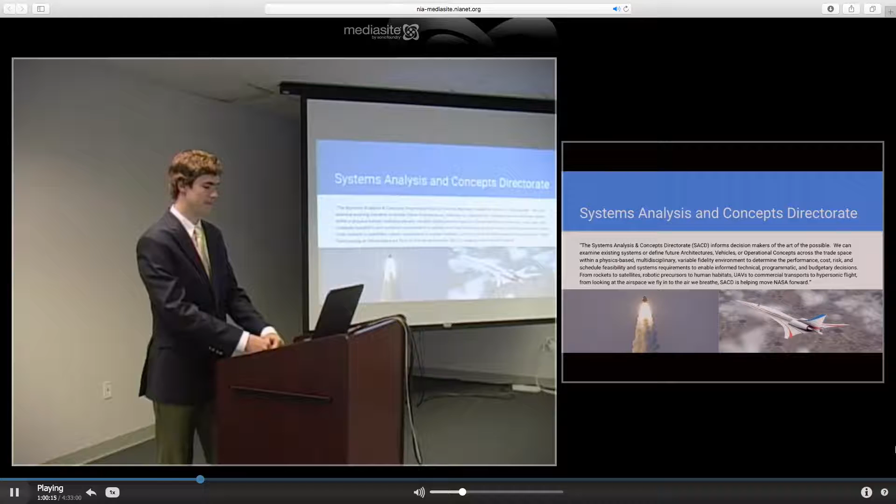The Systems Analysis and Concepts Directorate, SACD, informs decision makers of the art of the possible. We can examine existing systems or define future architectures, vehicles, or operational concepts across the trade space within a physics-based, multidisciplinary, variable fidelity environment to determine the performance, cost, risk, and schedule feasibility and systems requirements to enable informed technical,

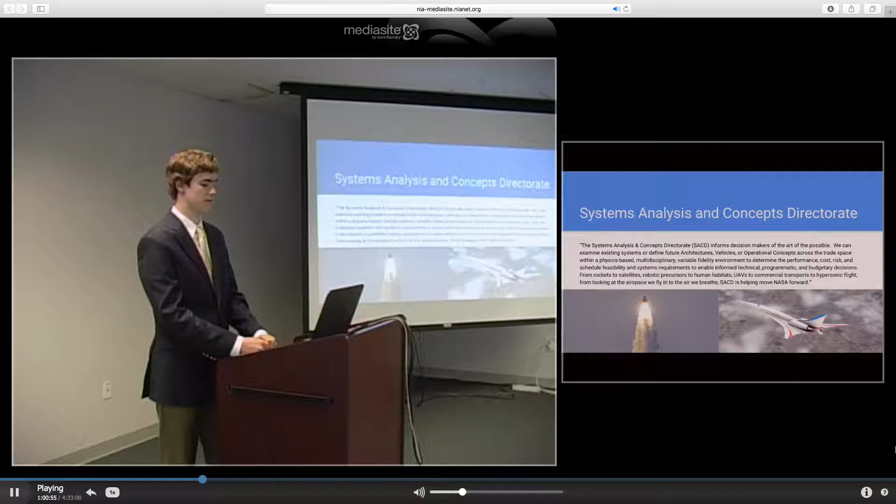programmatic, and budgetary decisions. From rockets to satellites, robotic precursors to human habitats, UAVs to commercial transports to hypersonic flight. From looking at the airspace we fly in to the air we breathe, SACD is helping NASA move forward. And the Vehicle Analysis branch.

The VAB applies its multidisciplinary system-level expertise of high-speed atmospheric flight and end-to-end space transportation systems to connect appropriate technologies to innovative system solutions that enable Langley Research Center strategic thrusts to support NASA mission goals. We employ deterministic and probabilistic variable fidelity analyses, implementing empirical and physics-based methodologies in order to provide timely, insightful analysis from concept to flight.

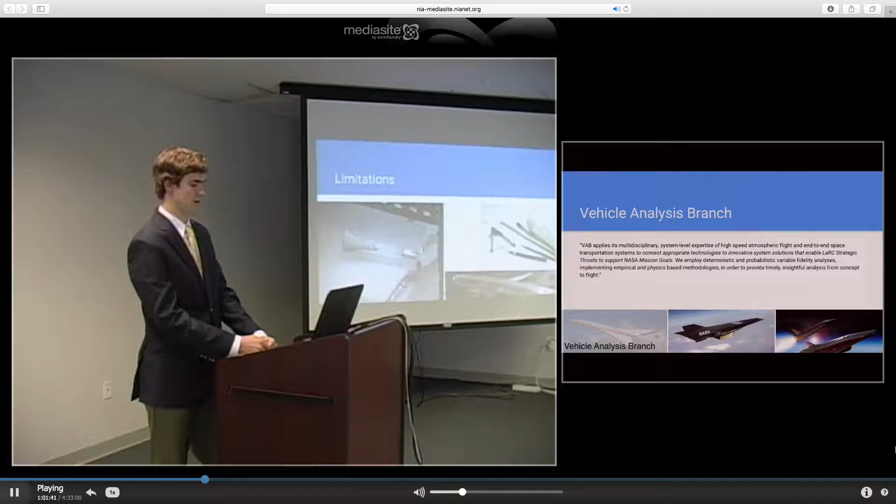Okay, so before the days of powerful computers, CAD software, and computational fluid dynamics, if you wanted to test the aerodynamics of an aircraft or a spacecraft, you had to build a wind tunnel. And you had to model it, or draw it at least. You couldn't model it, really. You had to draw it, which required lots of skills to be learned, and you needed someone to model something, which required a lot of time and a lot of technical skills. Wind tunnels also are hard to operate, and you can only do one thing at a time.

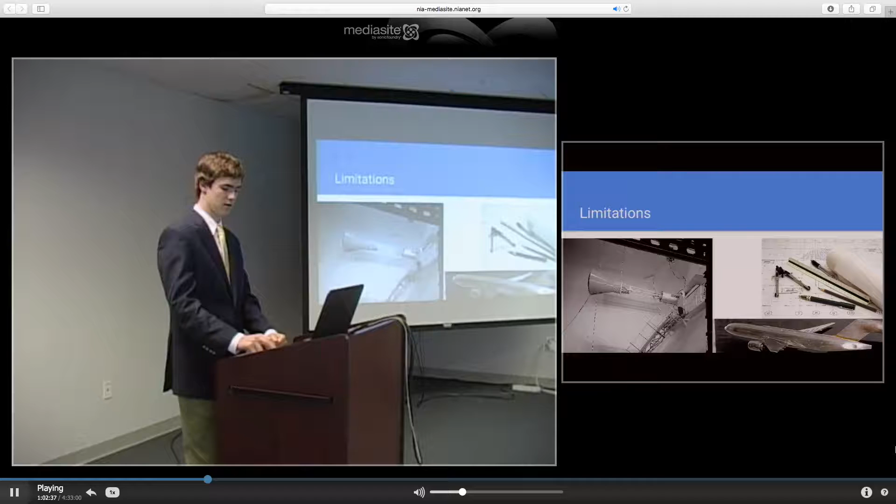With the invention of powerful computers and CAD software, that process became a lot quicker and more streamlined. Nowadays at NASA, anybody can model an aircraft on their computer, and they can test it in the CFD program. So this summer I worked with OpenVSP, which is one of these programs. More standard CAD programs are made to design relatively anything, but OpenVSP is specifically designed for aircraft.

Also, CAD and CFD programs are usually separate, and so that requires a bit of work to get a CAD file to work in a CFD program. OpenVSP has a simple CFD program built in to allow quick early aero analysis of a model. So specifically, OpenVSP has these traits that make it helpful for aircraft design. It has quick modeling. It's very easy to build something quickly in OpenVSP, but it's also highly accurate if you want it to be. You can build very accurate aircraft. And so it's specifically made for aircraft design and, of course, the built-in CFD software.

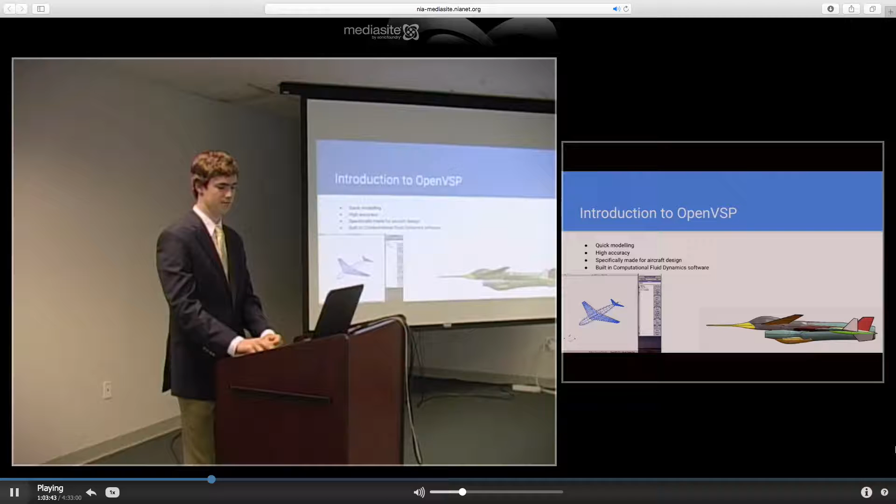So design in OpenVSP, how is that specifically made for aircraft? Well, first of all, you can right away, just by choosing what you want, say a wing, fuselage, or pod, create that. For example, on the right you see what you get if you just select wing, or on the bottom what you get if you select fuselage. And you can then modify these parts in different ways that are specific to how you would want to modify those parts. For example, for the wing, you can change the chord, the span, the angle of attack, you can change the shape of the airfoil, all sorts of stuff.

And for the fuselage, you would change that in more conventional ways, length, width, height, all sorts of stuff like that. So that helps you model more quickly and more efficiently. But that also allows you to model very accurately. For example, an airfoil is pretty difficult to model in a regular CAD program. But since it's specifically designed into OpenVSP, it makes it a lot easier, a lot more accurate, and also a lot quicker.

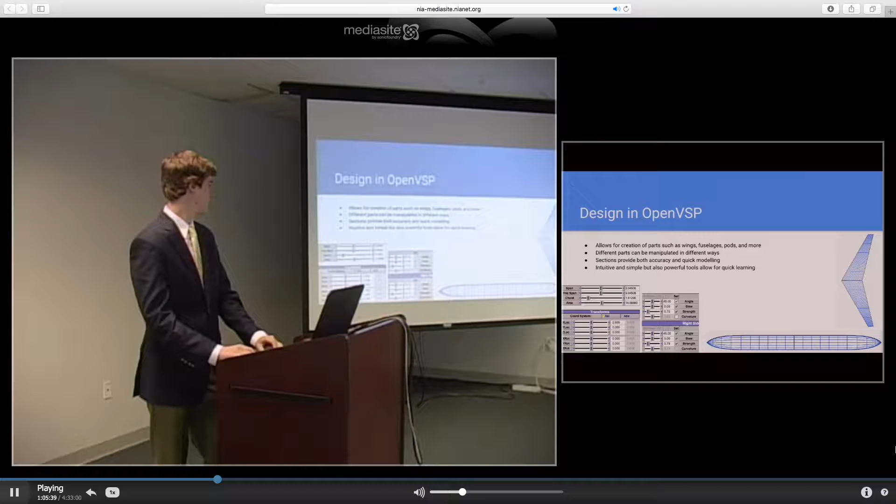Because of this, OpenVSP is actually also very intuitive and easy to learn. Because instead of having to learn a lot of unusual controls to get a roundabout, sort of long approach to get a shape you want, you just go straight ahead to that shape. And here are some of the controls that you can use in VSP. For example, on the top left there, you have the span, chord, area, projected span. Those are all for wings. On the bottom left, you can move things in the X, Y, Z axes, and you can also rotate them. And there's all sorts of other controls that you have that once you learn them, they're very intuitive and very easy to use.

Another great tool that comes with OpenVSP is the VSP Hangar, which is online and allows NASA workers to quickly share files between each other. And it also allows you to access files if you don't want to store them on your computer and take up a lot of space. So you can just go online to the VSP Hangar and load up these files onto your computer and do analysis on them, or adjust them to make them more accurate, or just change them however you want.

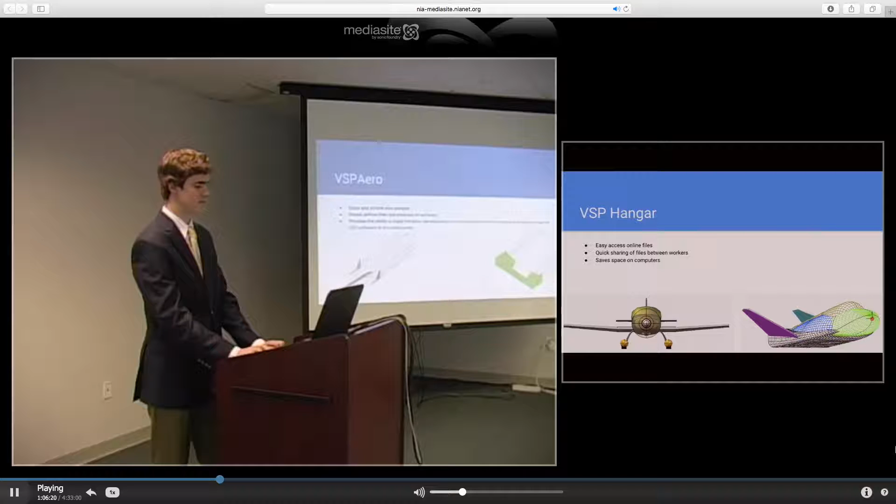So VSP Aero. VSP Aero is the CFD program that's built into OpenVSP. It allows quick and simple aero analysis of an aircraft or just a simple part. It shows airflow lines coming off of an aircraft and pressure on surfaces. And it provides you with just a basic idea of the aerodynamics of a model before it can be tested in a specific CFD program more accurately, or in a wind tunnel even.

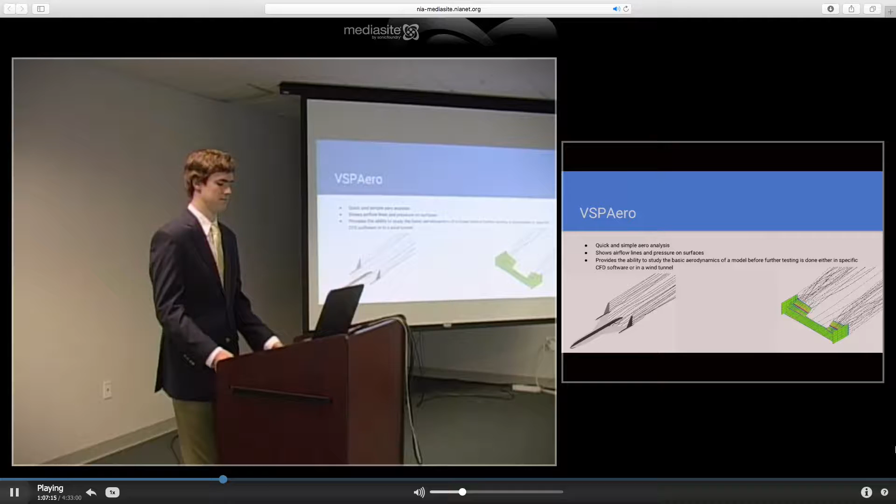And below you just see two examples of things tested in OpenVSP and VSP Aero. On the left you can see an aircraft, and you might see that the fuselage looks sort of like an extended bluff. That's just because in VSP Aero Viewer, everything's modeled in a sort of 2D thing, but the analysis actually is done on the 3D model. That just helps the program run more quickly.

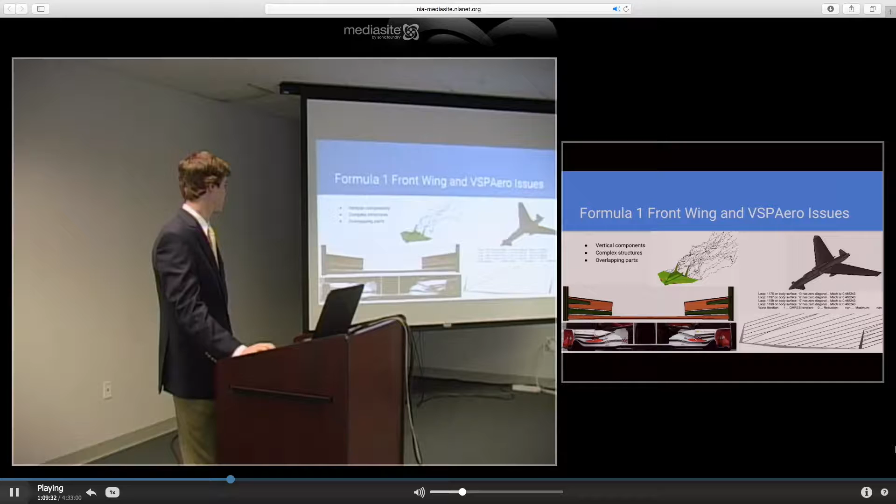So here's a more in-depth view of the issues with vertical components. So what I've modeled here is just a quick, simple sort of version of a Formula One front wing with multiple elements and vertical end plates. And in the top left, we see the left half of that wing viewed from the rear in VSP Aero without that vertical element. And you can see two nice vortices coming off of the edges of the wings.

And that's from higher pressure airflow on top of the wing, rolling off the sides of the wing and going down to the lower pressure air below the wing. And that reduces your wing efficiency and, in this case, the downforce that you're generating, which is something you don't want, which is why these vertical end plates are put there, because they keep the flow separate.

However, if you see in the bottom left, it's kind of hard to see the vertical end plate that's there because it's just modeled in 2D again, but it's calculated for the 3D shape. You can see that VSP Aero is all sorts of confused with that. The vortex on the right side is still looking good, but on the left, well, it's pretty insane.

There's two reasons that it's getting confused. First of all is the vertical component, and also the overlapping of the parts. Obviously, the elements of the wing wouldn't just be floating in space on a real Formula One car. They're attached to the vertical element, and I did that in the model, as you can see on the right. But VSP Aero doesn't like that.

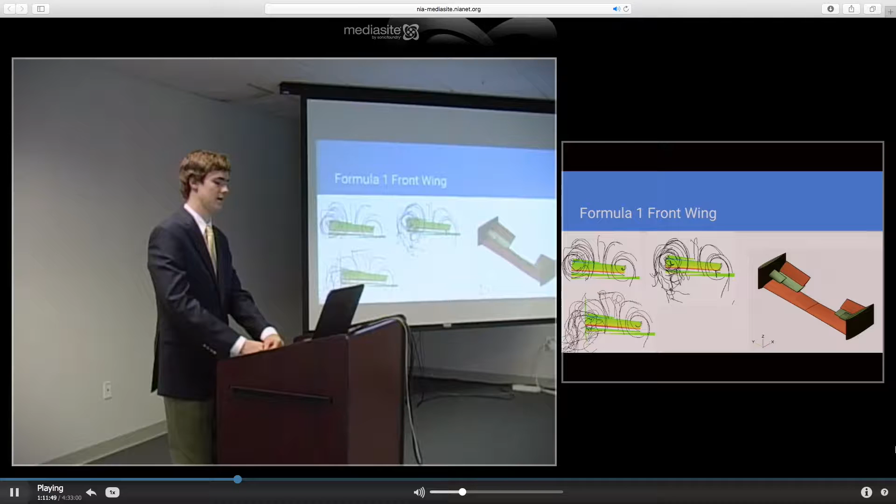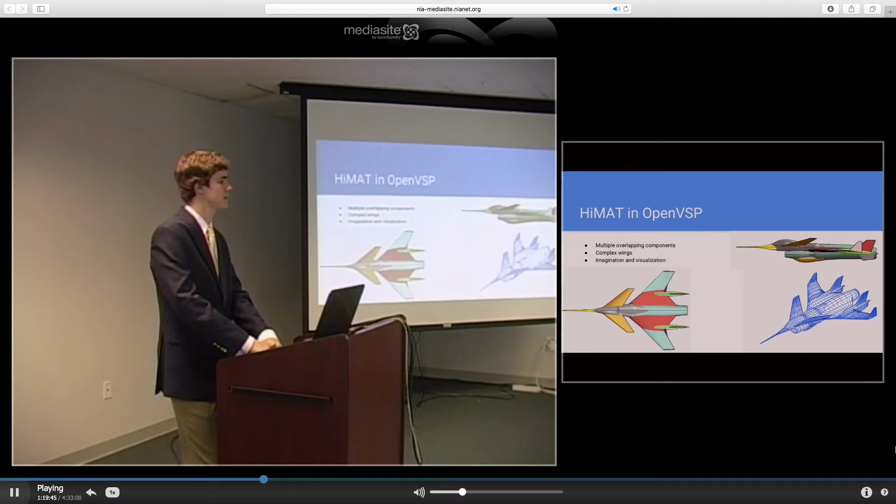I noticed on one slide you had a bunch of the sliders that adjust the degrees of things. Is that right? Yeah, those right there. So if you were to adjust those, would it adjust the degrees of the wings and stuff on the plane that you made yourself? Could you slightly modify it? Yeah, you could. For example, take that wing over there.

If I increase the span, I can type in a number or I can just move the slider. The span will increase, the length of the wing basically, or it will increase the width of the wing at the base. There's all sorts of settings that will change that. So you can plug in exact values that you know, or you can just roughly guesstimate depending on what level of detail you want. Okay, cool.

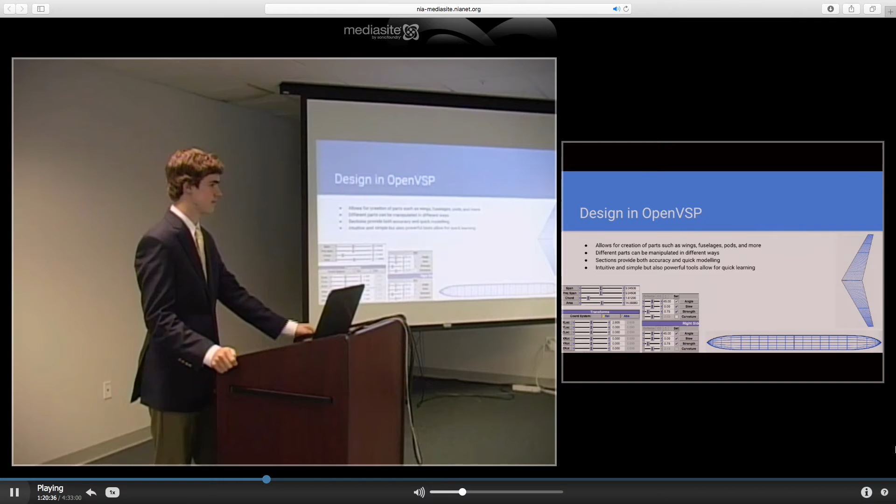So, thinking about your experience this summer, where do you see yourself 10 years from now? 10 years, I'll be 27. Wow. At 27, I'll probably be doing maybe a PhD or something like that, definitely in an area related to what I've been doing at NASA.

As I said, I was probably one of the people who got hit the hardest with some of the issues that can come up. But really, this has been such a great experience, and it's just cemented my belief that this is the area that I want to go into. So in 10 years, I don't know exactly where or exactly what, but definitely aerospace for me.